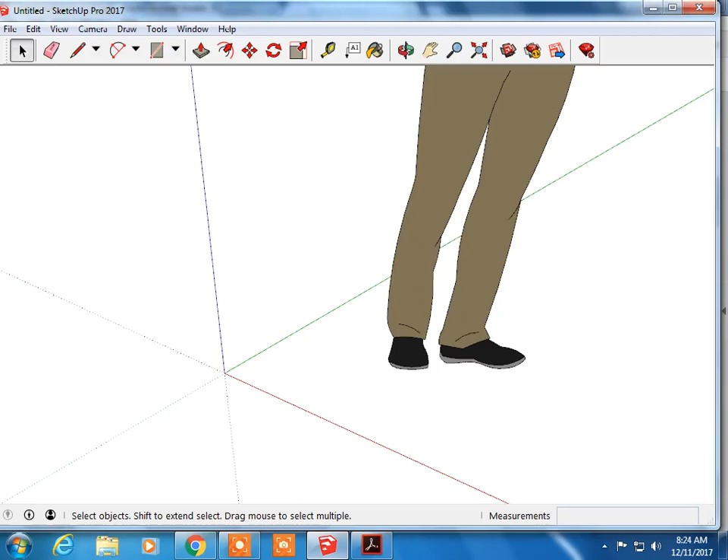The objective for this video is to demonstrate how to draw Object 5 from Plate 5.32 using SketchUp as a modeler.

First, I'm going to indicate how long this object is. It's 1, 2, 3, 4, 5, 6, 7 units long. It's 7 halves, so I take the number 7, divide it by 2, it gives me 3.5. And then it's 1.5 inches deep.

Getting back to SketchUp, I'm going to delete this person. I'm going to take a rectangle tool. It's 3.5, 1.5.

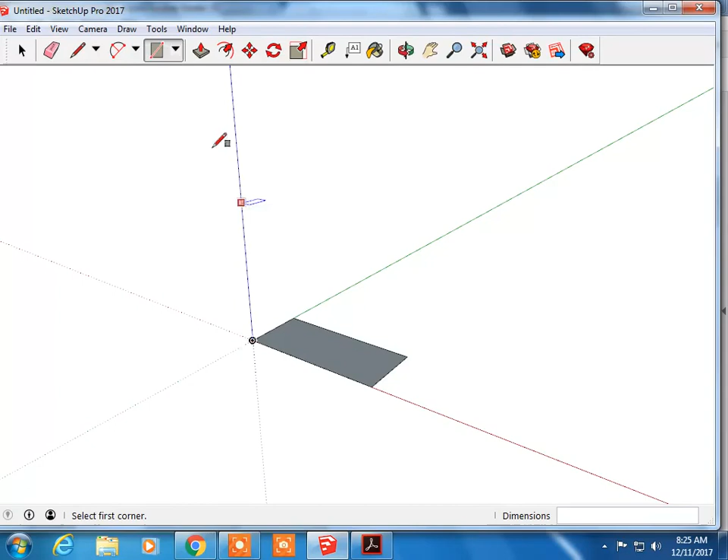So checking the total height of the object. Total height is 1 inch there plus 3/4. So that's 1 3/4 inches.

Now, looking back at the object there, I can see this Z shape here. The first thing I'm going to do is subtract this part out, and then I'm going to subtract this part, using push-pull to subtract them.

First thing I need to do is take a look here. It's 1 inch over and then 1/2 inch from the top. So I'm going to get a guideline tool. It's going to go over 1 inch, and then it's going to go down 1/2 inch.

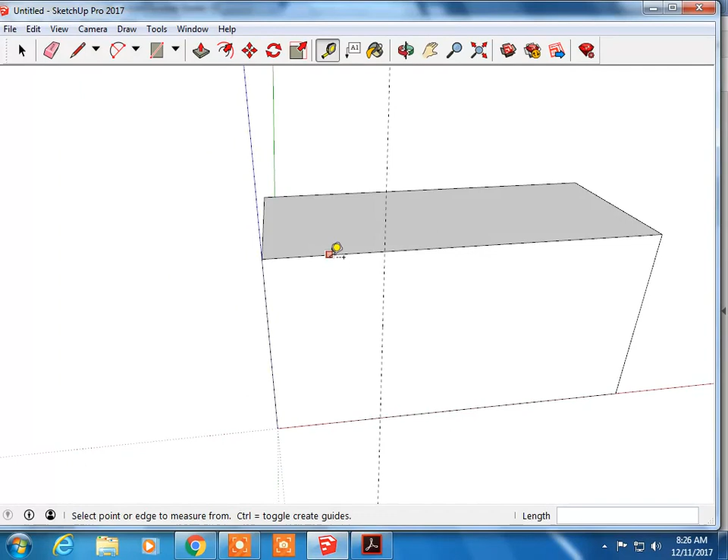Now I'm going to push-pull this back, subtract that away. I'm going to clean up my guidelines.

Now I'm going to work on this side of the object. Taking a look back on the drawing there, I can see this edge right here is 3/4 inch from this edge, and this base pad here is 3/4 inch thick.

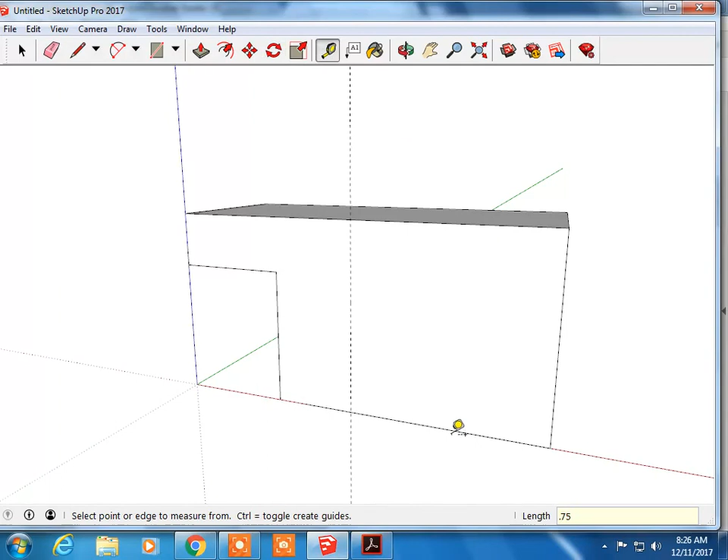So I'm going to go ahead and take the guideline tool, move this over 3/4, and I'm going to move this one up from bottom to top, 0.75. Then I'm going to take a rectangle tool and subtract this part away like so. Alright, clean up my guidelines.

Now looking back on the drawing, there's this little block toward the back of the object. I can see it's 3/4 inch wide, and it's 3/4 inch left to right. So back to the modeler, I'm going to take my line tool, draw a line right at the midpoint, and then push-pull this over 3/4 inch.

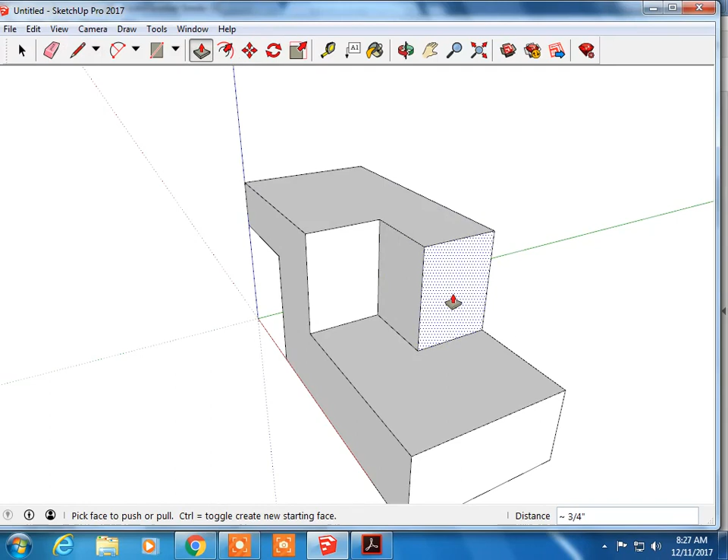Okay, now the hole. Taking a look at this object, I can see the hole's edge is 1/4 inch over. That would make the hole center 1/2 inch over, and then it's centered from front to back.

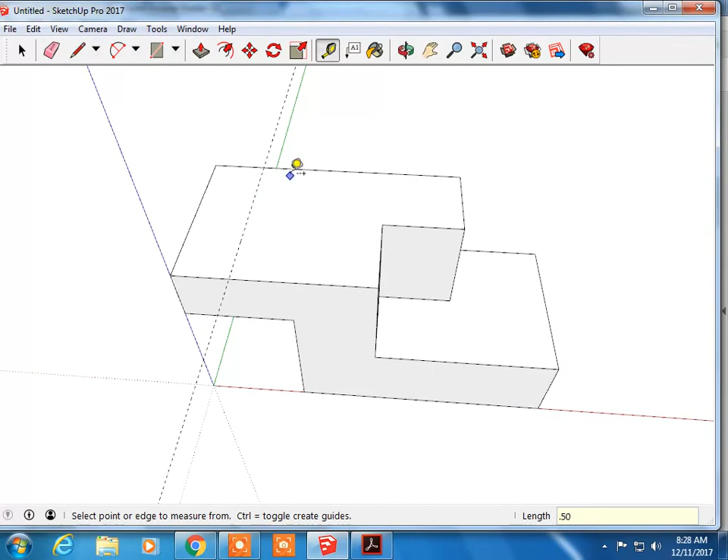So, guideline tool, 1/2 inch over from left to right. And then I'm going to take another guideline here, and put it right at the center point there.

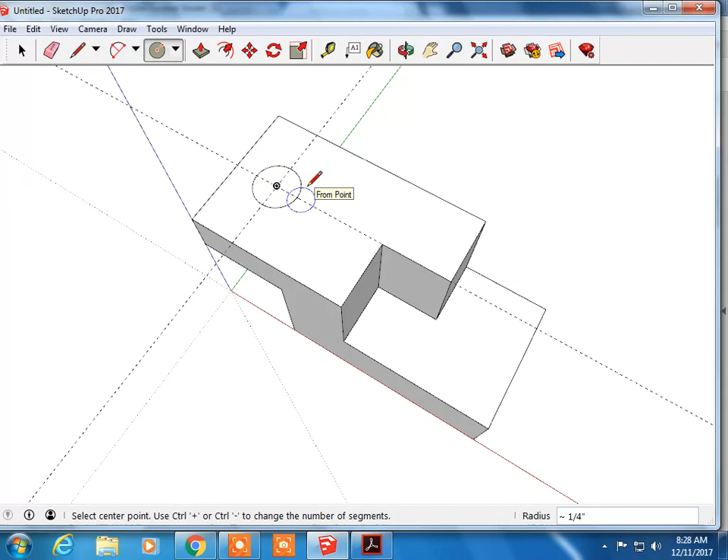Alright, now I'm going to take the circle tool, and draw a 1/2 inch diameter circle with a 1/4 inch radius, and push-pull that to subtract it.

Clean up my guidelines. Now I'm going to work on the channel on the underneath side of this. Looking back on the drawing, I see it's a 1/2 inch wide channel that's 1/4 inch deep.

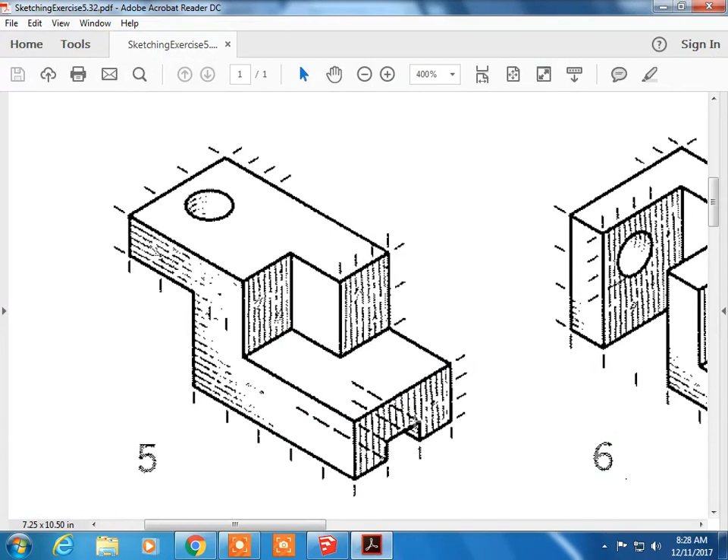So I'm going to start out with a center line, because this feature is centered. There's my midpoint snap. I'm going to drag this over 0.25, and then drag this over 0.25, and then place a rectangle right in those reference points that I've created.

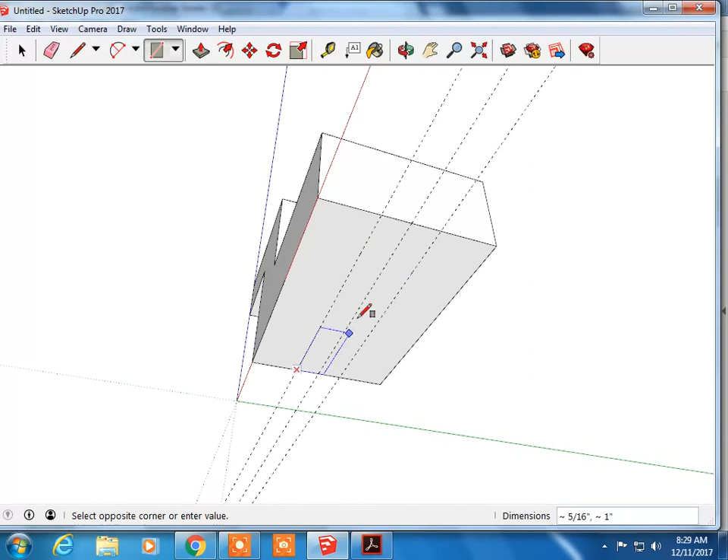Now I'm going to go ahead and push-pull this upward 0.25. Alright, I'm going to clean up the guidelines now.

I'm going to turn on back edges, and then I'm also going to show hidden geometry.